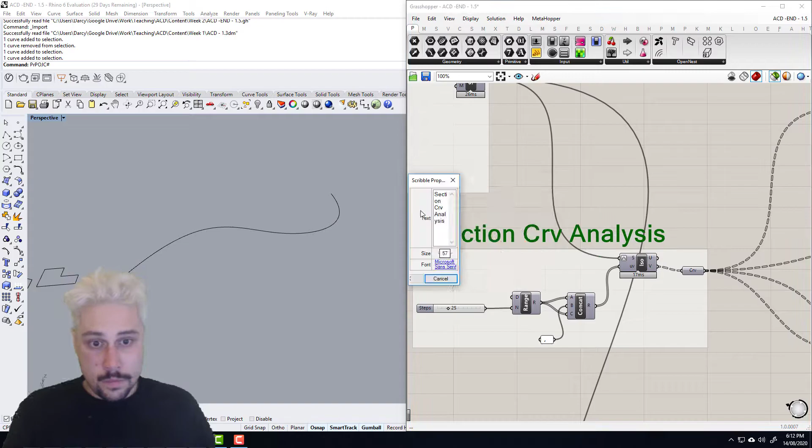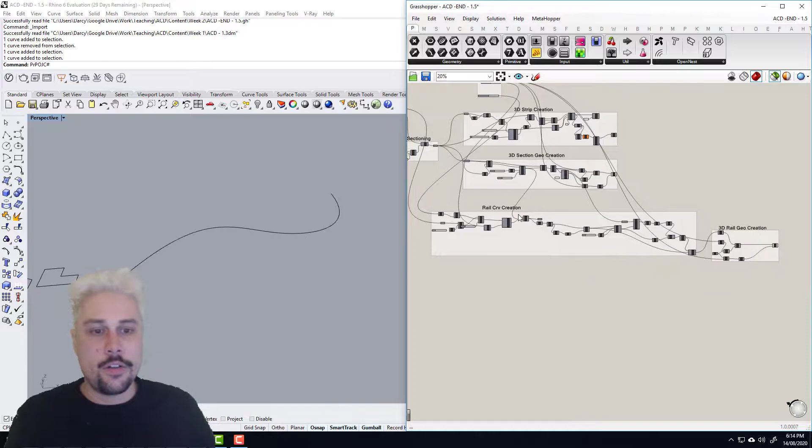Hi everyone. As you can see, I've just gone through and cleaned things up a little bit. There was a lot of messiness, things just weren't labeled properly.

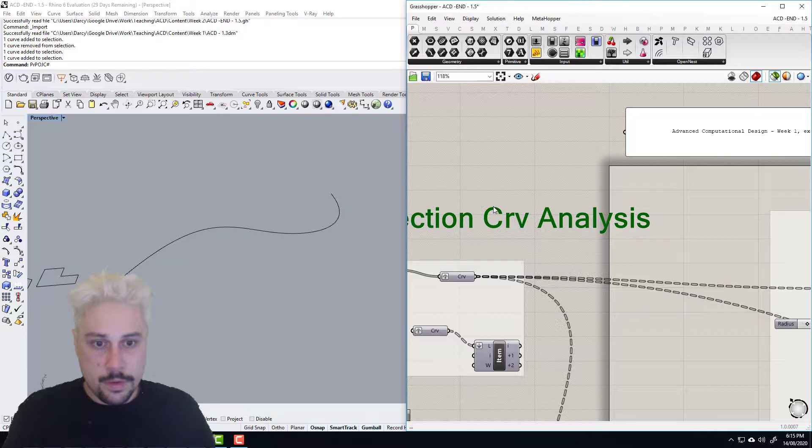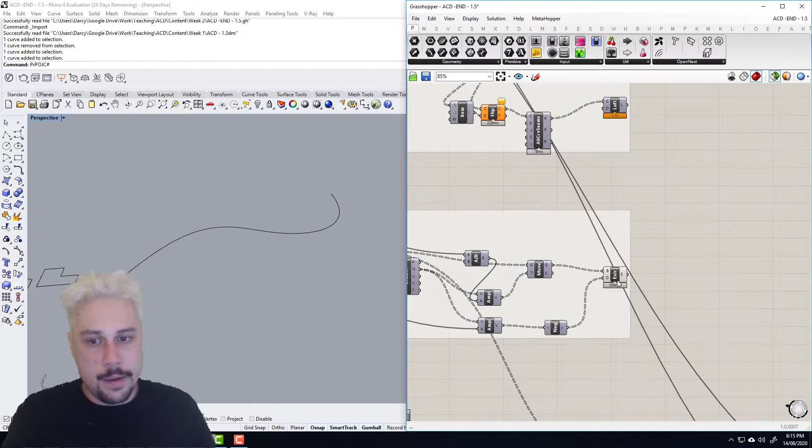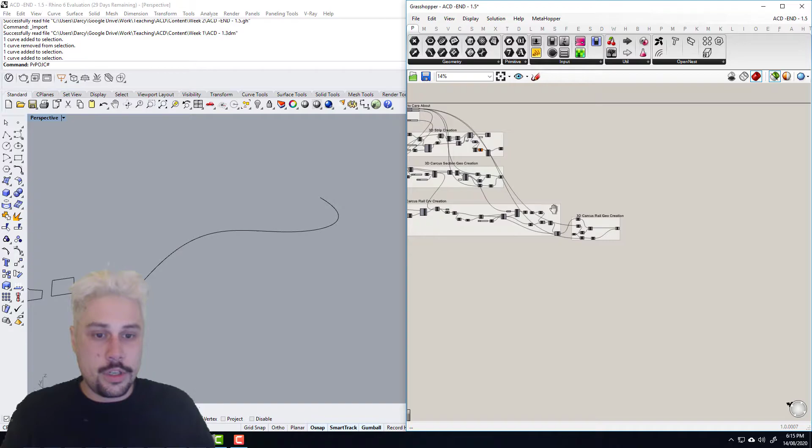You can see how our whole workflow has been based on these imports, which help create a bench surface - just a NURBS surface created with a sweep. Then we section it and start to create the 3D strips, create the 3D carcass, and then the carcass rail curve creation, followed by the carcass geometry extrusion.

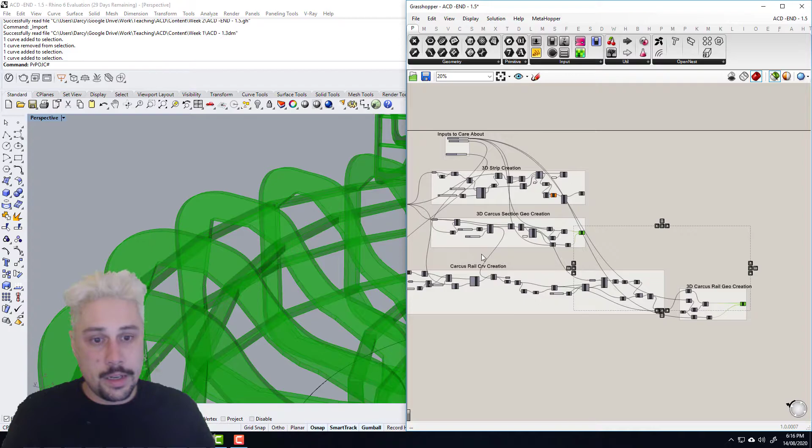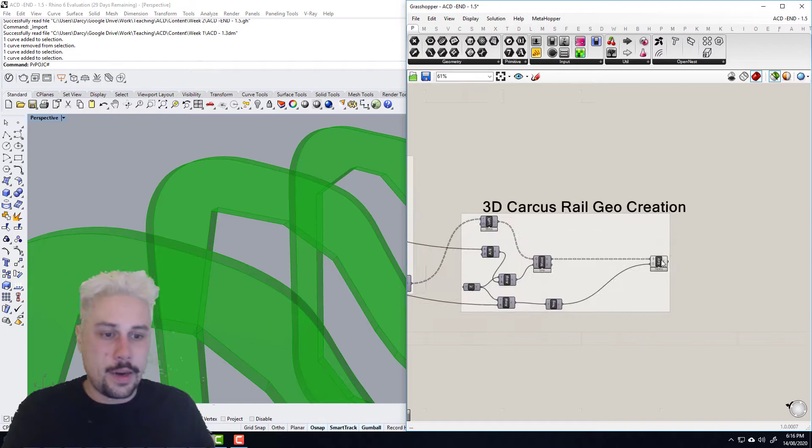Our longest workflow so far has been creating these supporting rails, and it'll continue today. Currently these rails are intersecting our carcass sections, so what we're going to do is notch them in - subtracting a box across every section, and the amount we subtract is about half the width of this carcass rail.

There's no sheet of plywood that big, but all these carcass curves should at least start to fit neatly into some notchings that we're going to put in here.

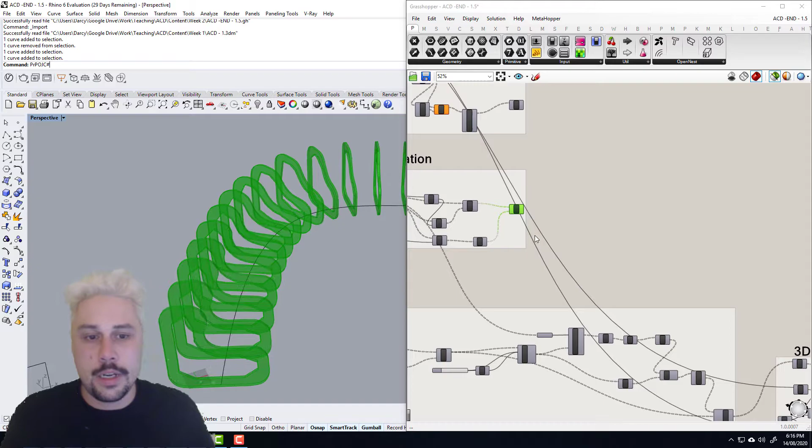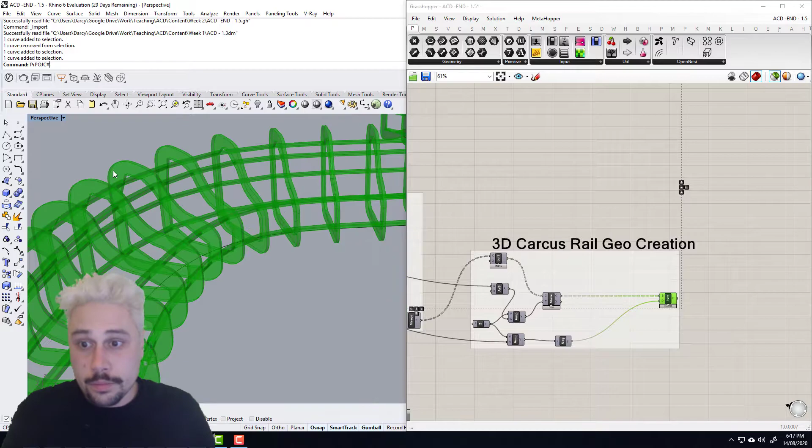Why is that good? Because when you come to stand all these things up, you don't want a carpenter to just rely on lining it up and nailing it in. We're going to use digital fabrication equipment to at least locate everything. The fixings will still have to be done with a nail gun or whatever, but we've gone through some effort to make everything line up.

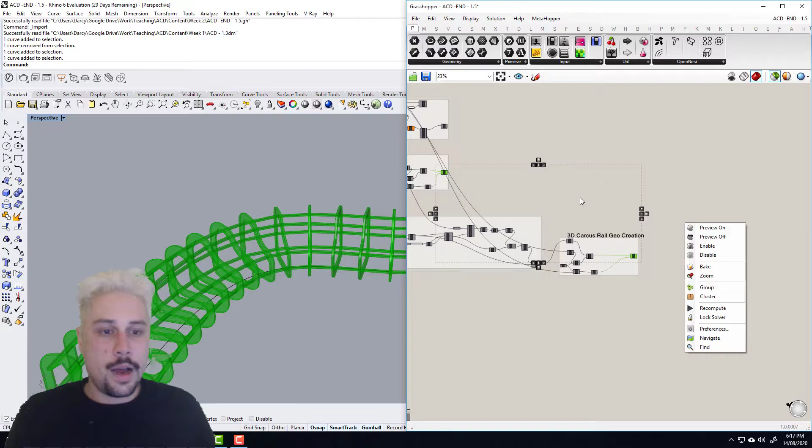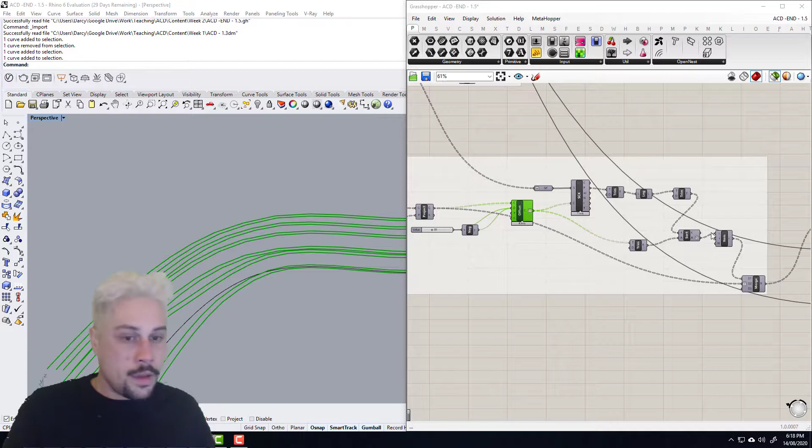So the first thing we have to do is create some more cutting curves based off this rail creation. Remember how I said we're going to move it across by 2 - we're going to use this original offset amount and divide it by 2.

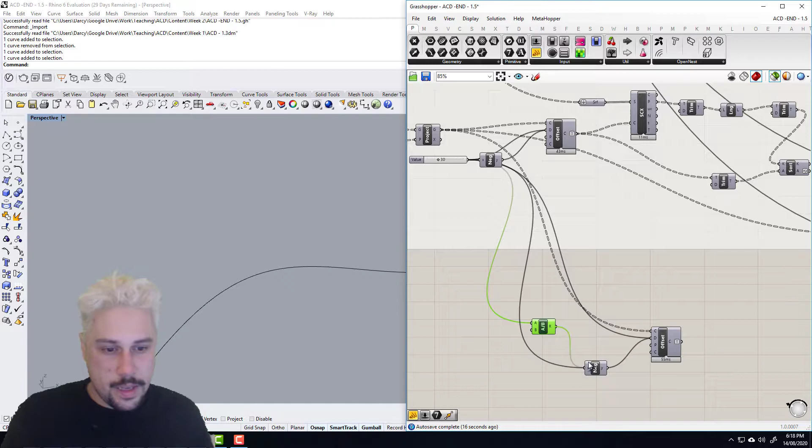I think I want to bring a lot of this down. What geometry are we offsetting? The same project geometry. I'm probably going to want to offset it by this new distance - and just to make sure, I'll drop an XY plane down. So half the distance this time.

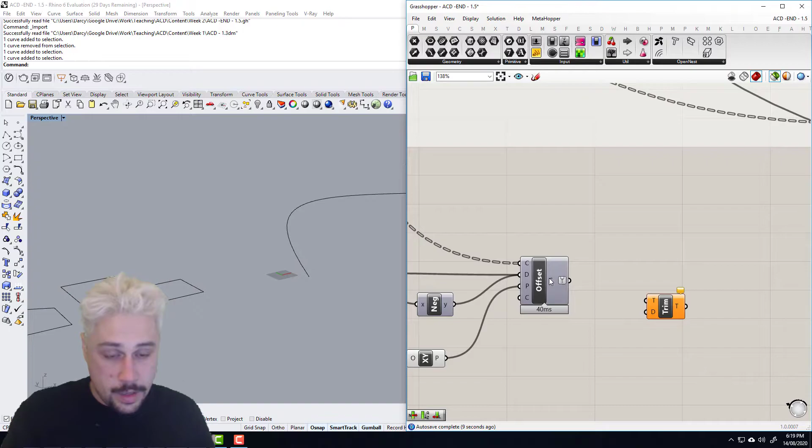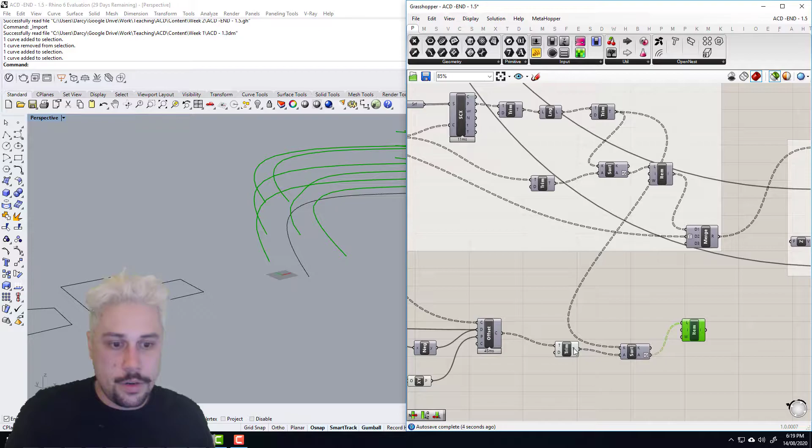Now I'm going to trim the output of that list - not simplify it this time, just trim straight down so you get groups of 2. Then we borrow this workflow directly from above, but sorting these curves this time. Because the data trees match up to 2, we're ready to go - except I still want to reverse that.

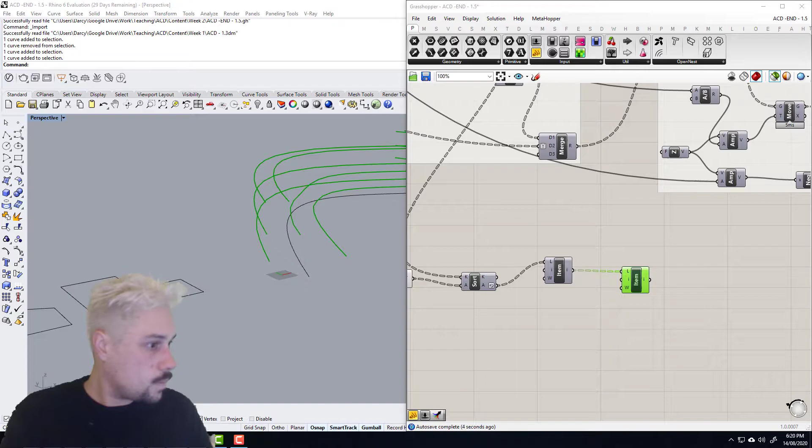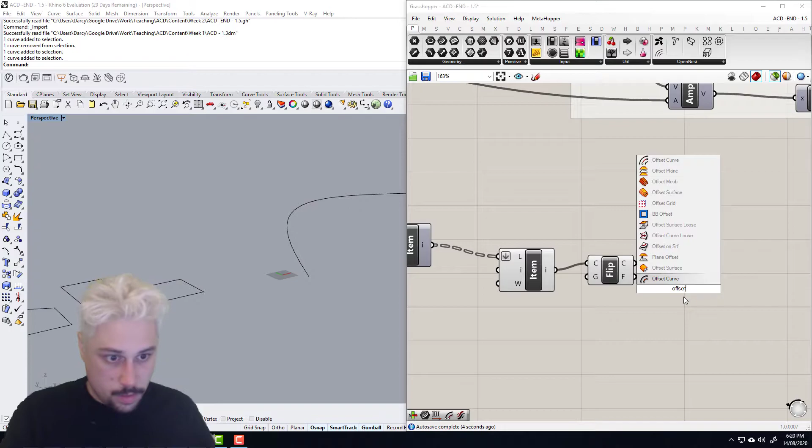Great, so that's the first bit done. Let's move on to creating some 3D interpretations of it. I just want to make everything the right direction, and then we're going to offset them.

About 100 - I'll show you what this is going to be doing in just a minute. We've set up some kind of cutting curve, a kind of cut base, but we need to cut a little more out just so we can insert our parts a bit easier.

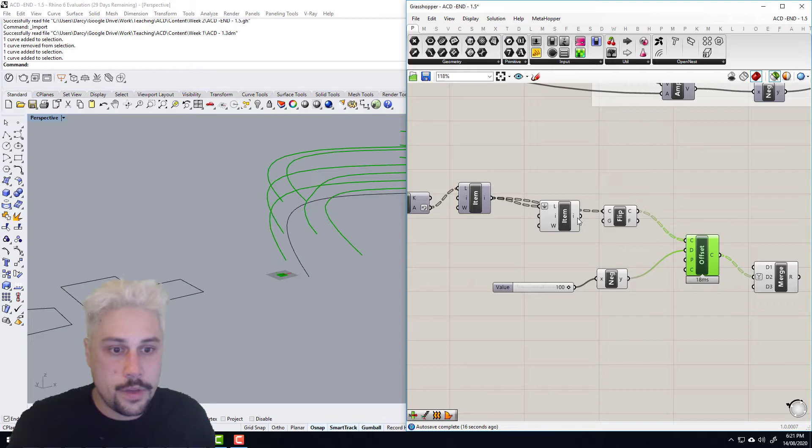Let me just fix a few things up. I actually want to sort these according to this - they should be aligned anyway, but just checking. Oh, there we go - they are aligned anyway. Don't need to flip them because we did that in one of the last videos.

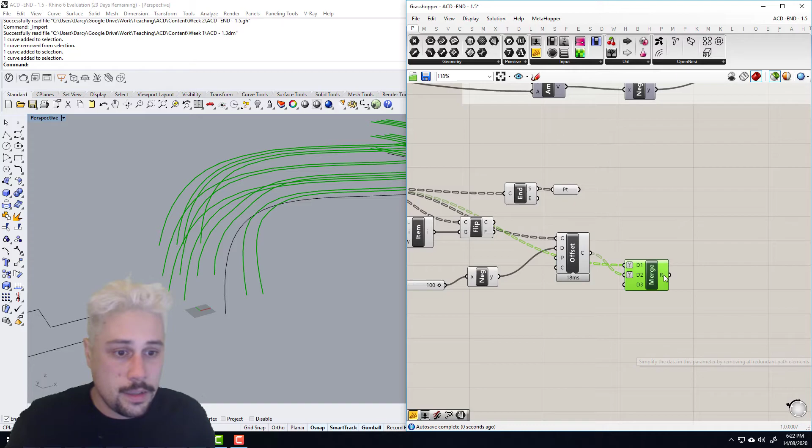So there's our offset ones, and I think I better simplify that as well. Then what I'm going to do is extend all these curves out, positive and negatively, by about 40. Let's plug that in there.

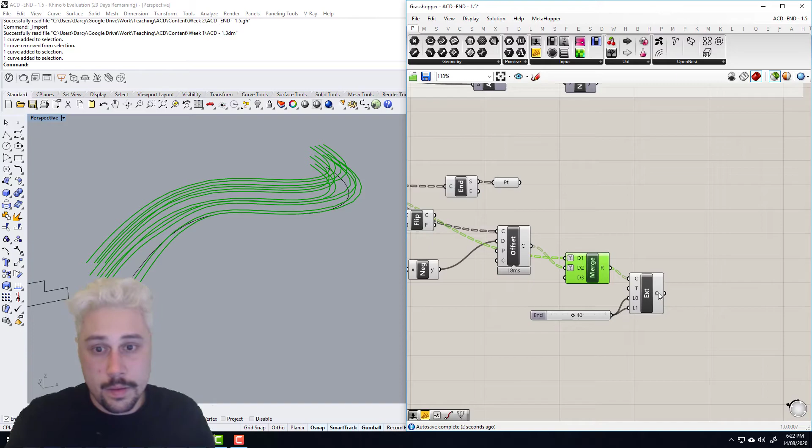We've got longer, and now things will start to fall into place and make a lot more sense. I need to copy this above workflow to offset and move everything, because it's essentially the same.

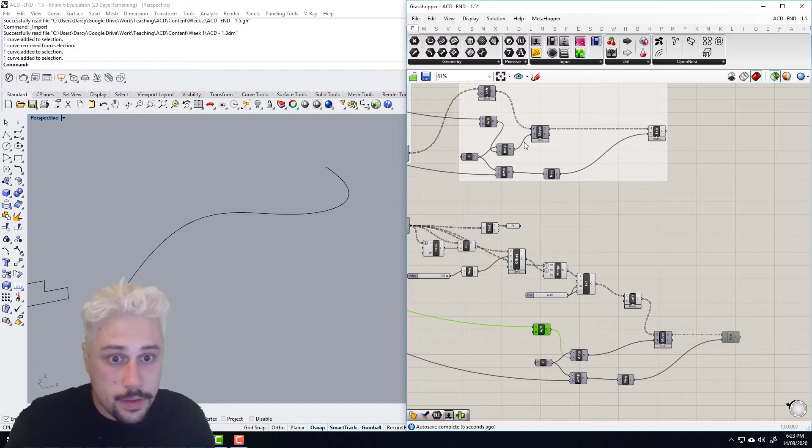Okay, what am I doing - let's just turn that off in case I do something. I'm moving this loft up, and I'm extruding it downwards. I think that should work.

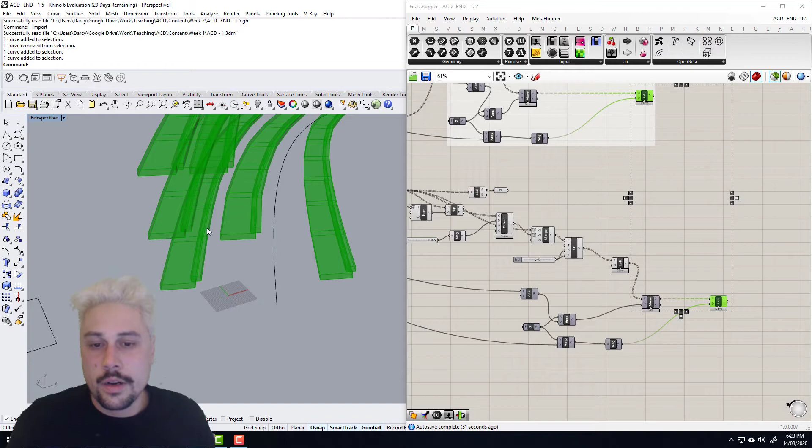Oh, I think I need to work on - okay, I just discovered the problem that everything is offsetting on the same side. See how it grows to the left of the screen? What should happen is it should be growing on both sides of the screen. I realized that I did need to use these flip curves after all.

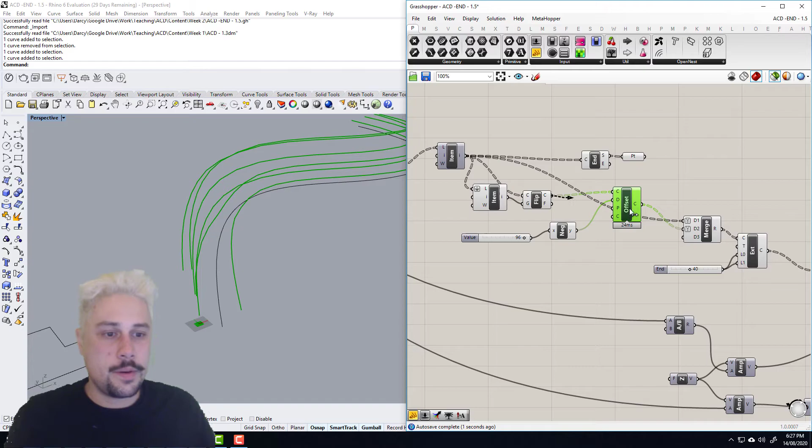So offsetting these flip curves, and also merging these flipped curves as well, so that the whole thing lines up. See that? It's hard to see those top ones because the section's a bit weird, but see how it extends out? That's because when we come back up here to our creation - here we go.

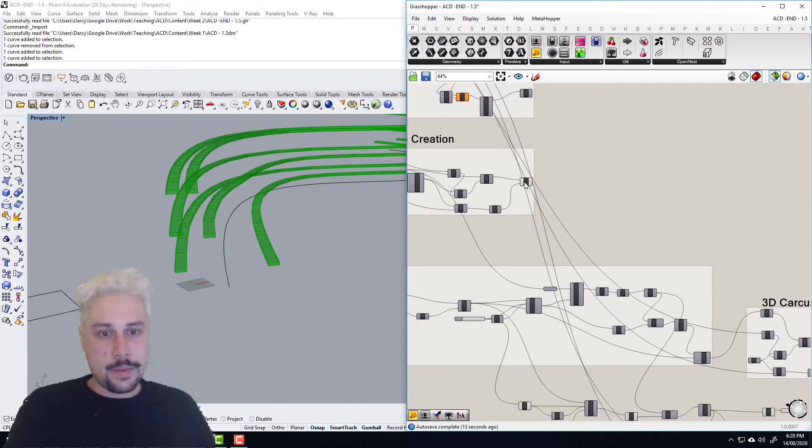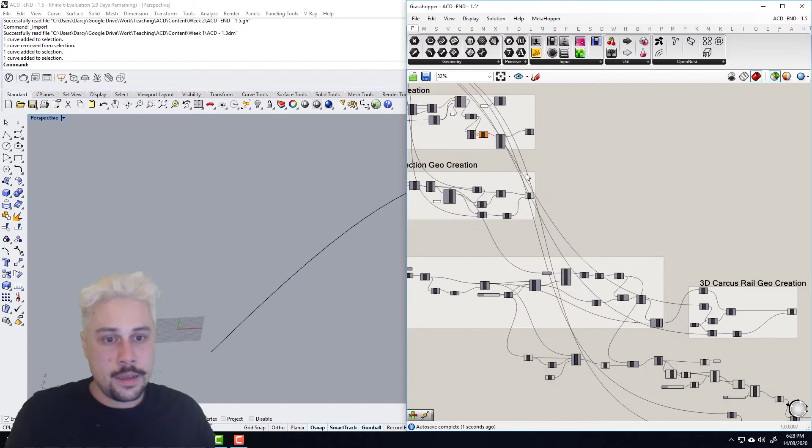What I'll actually do is we can do the Boolean difference on it now. I need to flatten these - they're our original extrusions. So that's the load. It does take a little while, but here we go.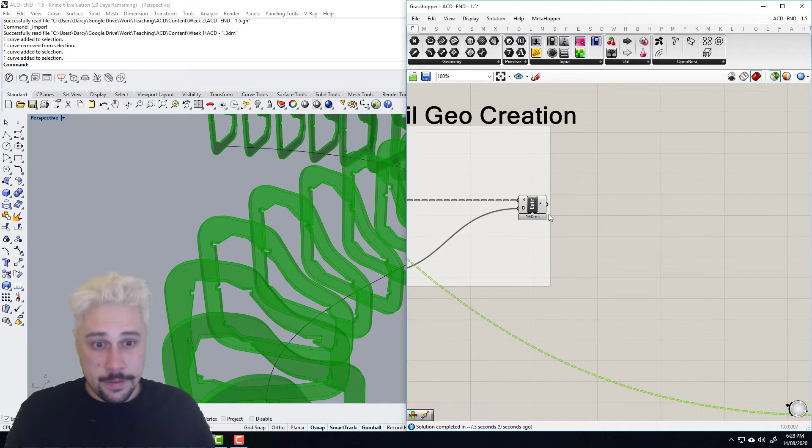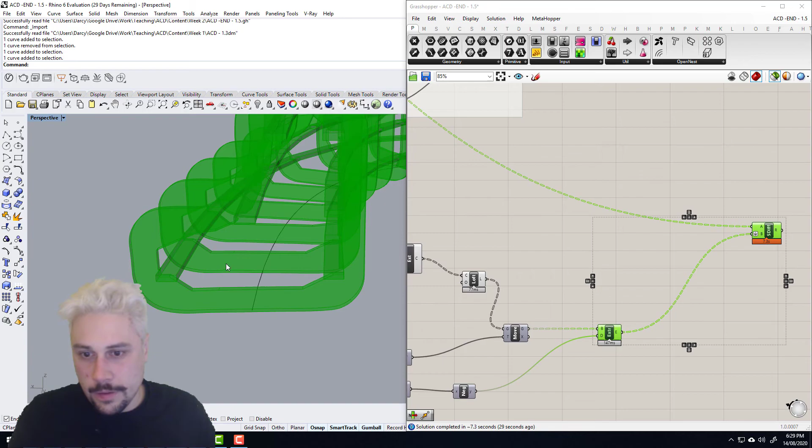So here we've taken out all the cuts, and if we've done this correctly, all apart from that other side there, they'll all be sitting in there pretty nicely. What I was doing before is subtracting out a little more than the original width - just to account for any weirdness in the geometry happening right around here, or anything getting in the way. If that curve came down more, it would just account for it entirely, and it's done.

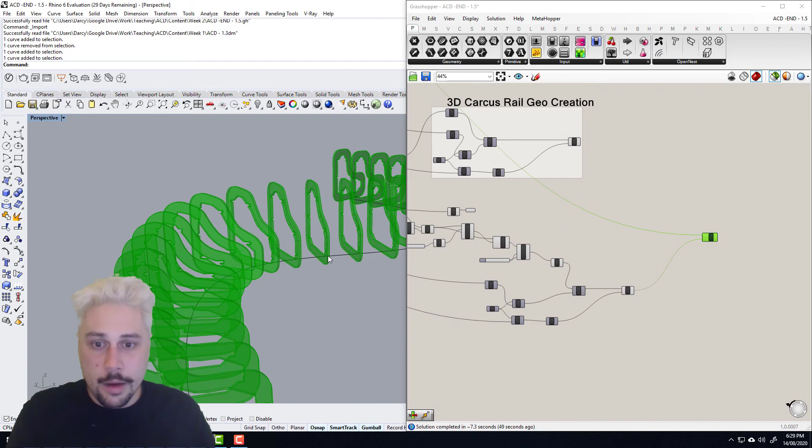We're in a pretty good place now. These are all ready to be cut up, as are these, and we can start laying them out for fabrication. Cool, stick with it.